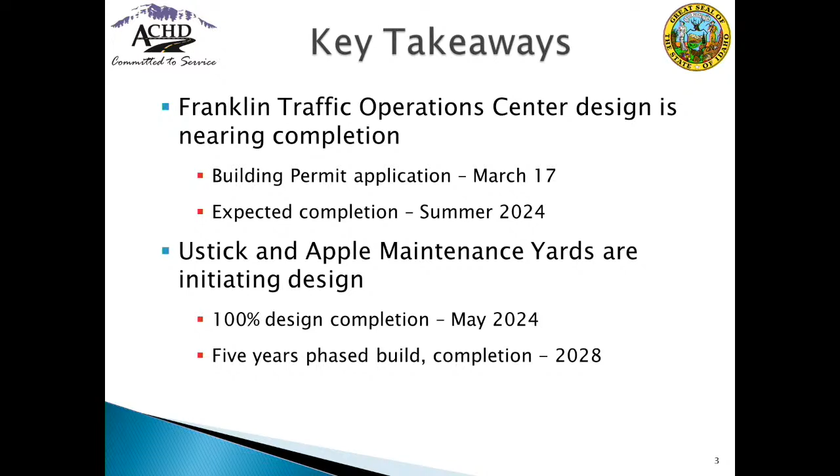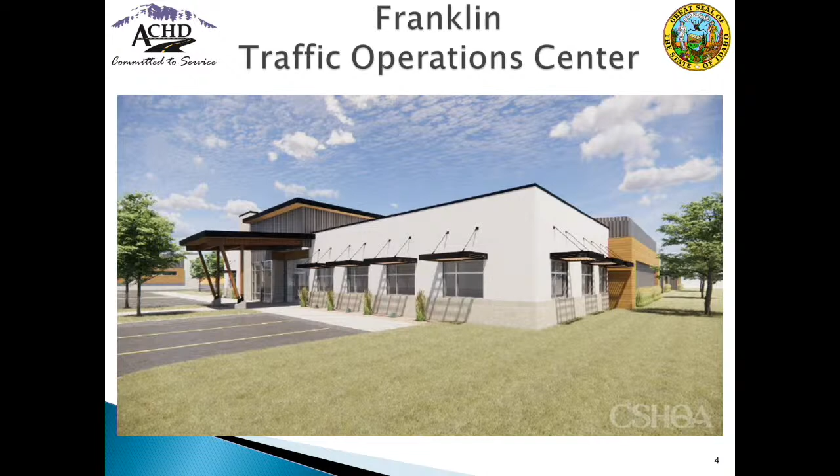This would be the outside and the general idea there. The site will have 4 different buildings. The front up along Franklin, which is there on your right. The Traffic Operations Center will be the main location where staff will be seated. We'll have a shop where we can do construction of new signals, of signal hardware. It's where we will maintain our paint equipment. Currently, it's done in a very tiny garage where the staff has to take apart and rebuild the paint trucks each year. So we'll have equipment there to allow them to do that inside.

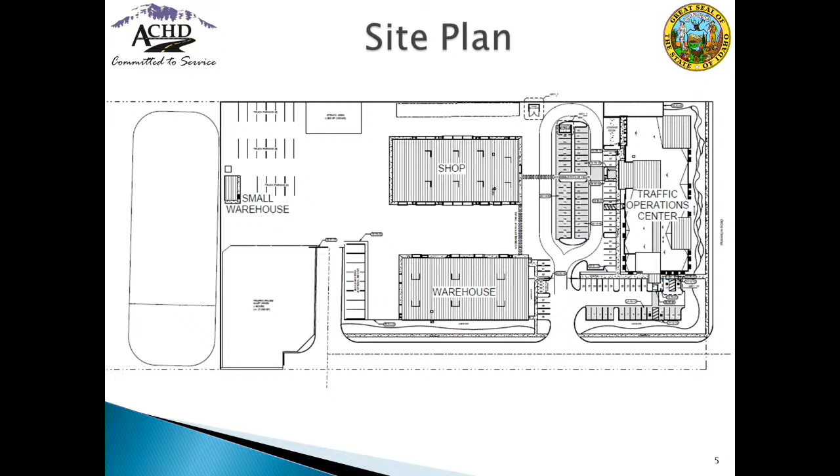We'll have a warehouse where we'll store all of our paint inside and not outside. That's where our signs will be, and all of our traffic signal equipment will be able to be within that warehouse. We'll have some parking for vehicles in the back, as well as a small warehouse for the storage of our telehandler, which is the one that lifts the big heavy mast arms and signal poles, which will also be stored there in the back of the site.

We do currently already have a stormwater basin in the back that we'll be updating to meet the current standards, as well as we've provided through the design process a dedicated easement along the back that could be used for future rails with trails, as that backs against the rail line and as they're able to secure future easements that could be used for that.

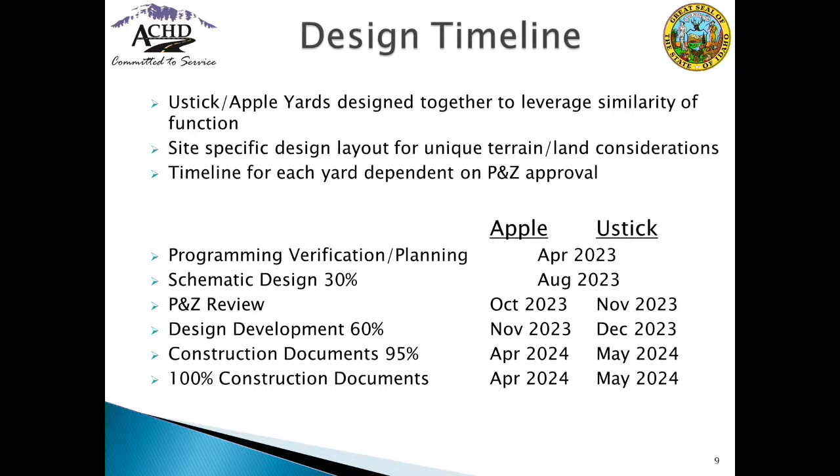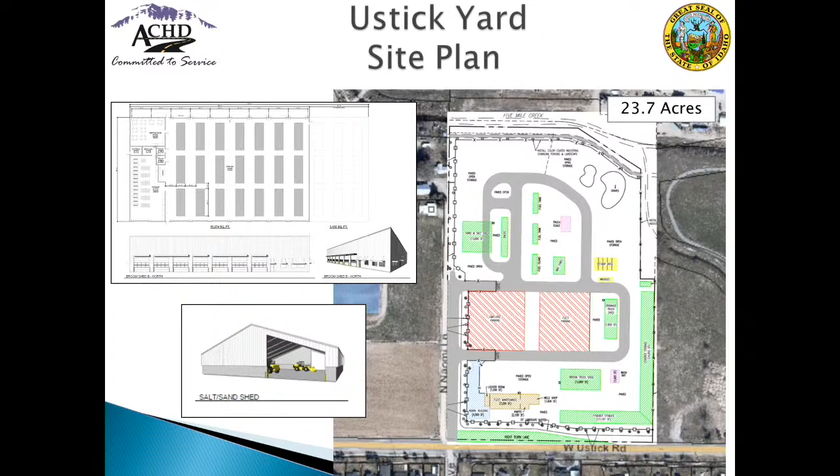What I did want to highlight on this is somewhat of what the buildings are going to look like. The upper one is our broom shed, where we're planning for putting the sweepers in 3 deep, and then 7 across, so planning for 21, but then expansion capability. So when they lay it out in the yard, the buildings aren't going to be crammed next to each other. We're going to leave some footprint for future growth if we need to. So we're not going to build huge and hope that we get there sometime in the future. We're going to build slightly more than what we need right now, with potential for expansion as we continue to grow 20 years down the road. The salt shed at this location is going to be a hard structure, mostly enclosed, so it'll protect those materials as well. We have 23.7 acres at our Ustick site.

Summary of improvements. We're planning all the buildings for all maintenance roles. So right now we have some roles, like our sweepers are just here at Adams, and then we have vegetation and our drainage crew out at Cloverdale. The plan for both the Ustick and the Apple site is to have all of the functions, having that capability at each of those locations. Just because as we're growing so much, getting those pieces of equipment and those crews closer to where the work is being done is going to improve that timeliness. The other benefits: we're going to, like I said, build to an immediate need, plus a little bit, and then preserve footprint for future growth. As you know, with the Ustick yard, a lot of growth in that direction.

So this yard is pretty critical to being able to handle all of that additional growth out in that side of the county. Estimated cost, you'll see, is $25 million. So that's kind of an early estimate based on what we had given to the architect on the size of the buildings. So this was their estimated cost. I think as we look at how things are developing at the Franklin yard and the cost of materials, I do anticipate this will probably be updated once they finish all of the design thoughts and finish kind of the initial concepts of the buildings for us. So we'll continue to keep you apprised of that.

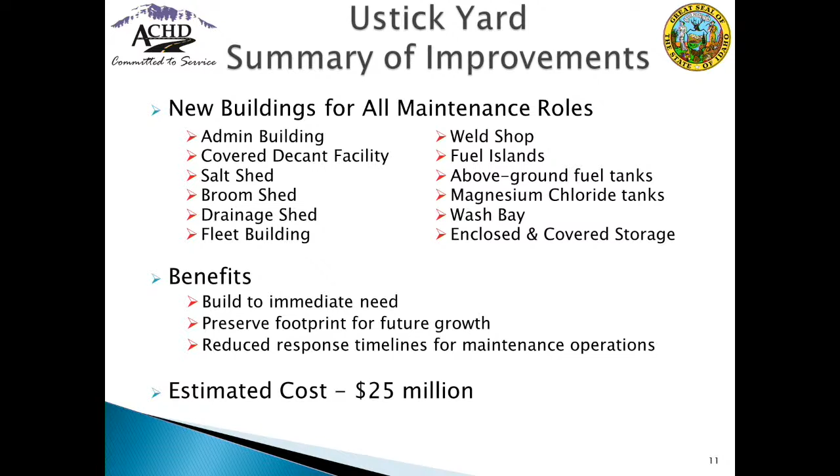The concept for the Apple yard, I don't know, that is a pointer. Up on the north end, this is where Federal Way is. Here, I can do it over here. So this would be the admin building, Fleet Shop, kind of on the frontage there, and then the bulk of operations would be pushed back away from the Franklin yard. It's kind of nice. There's also the railway here, and we're investigating whether or not a rail spur makes sense at this site as well.

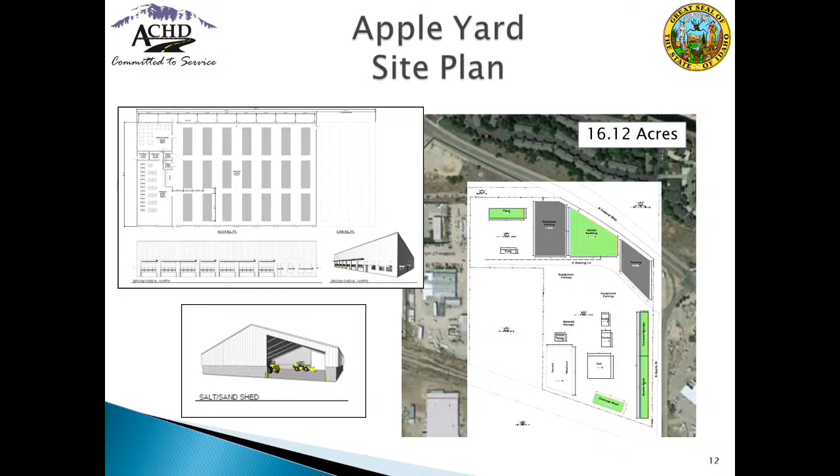Summary of improvements, literally a cut and paste from the previous slide. All the same buildings are being planned simultaneously. The one difference between the two yards that I didn't really highlight is that the Ustick yard is going to have above ground fuel tanks because of the floodplain, whereas Apple Street will have those fuel tanks below ground. And then the benefit is the maintenance coverage for growth to the east, and then of course the dialogue we've been having about Adams yard as well. Estimated cost is the same, $25 million, just based on our size of the buildings and the estimate.

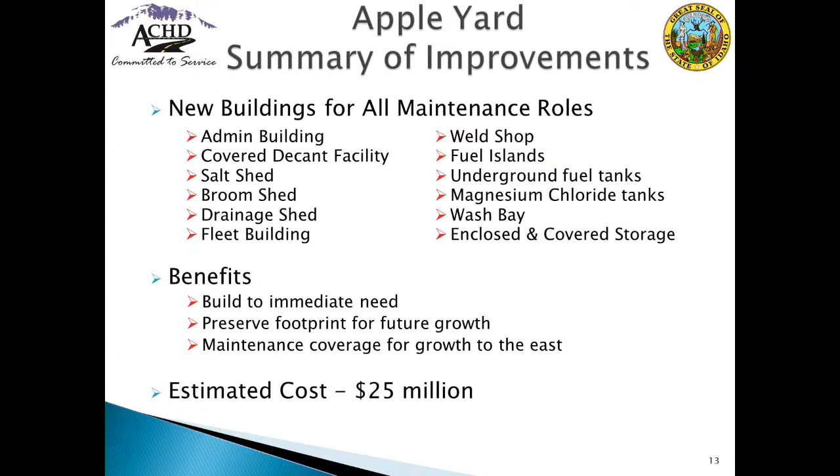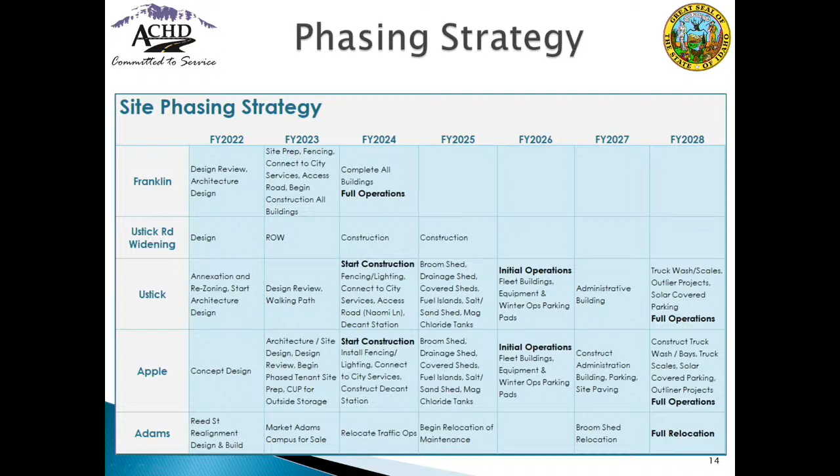So these 2 years, 25 and 26, are really going to be critical for where are we in the development and what does that mean for relocating some of our functions. And that is all I have. So as a summary, the Franklin Yard should be reaching their completion in summer of 2024. And we'll have our design of the Ustick and Apple maintenance yards in May of 2024, and then building out in 2028, 29 maybe. So I will stand for any questions.

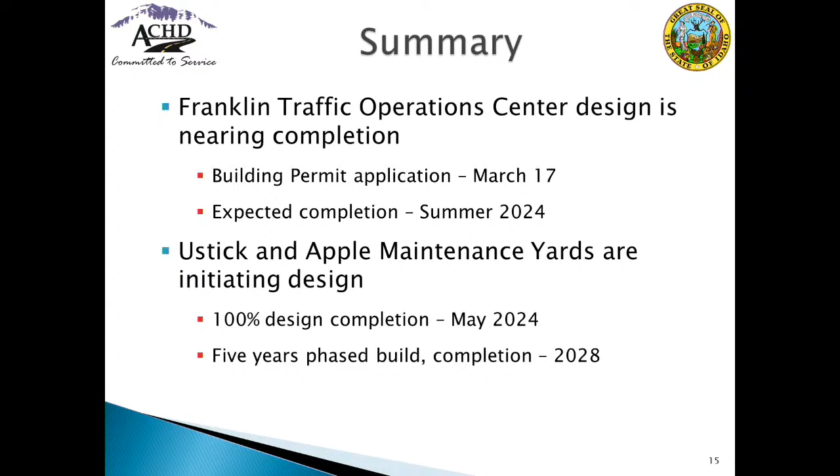Thank you, Jennifer. I have a couple questions. So, for those of us that were on the commission when we all went to Meridian to hear about the Ustick yard, some of their biggest asks in my mind, as we're looking at architecture and all of that sort of thing: how are things going with the fencing for that Ustick yard and those components and the design and all of those elements?

Yeah, we're all still on the very front end of it, but we'll be meeting all of those desires from the City of Meridian. I did want to mention that the design for the Franklin Yard, he showed that, we're going to be mimicking those same looks. So that really does meet, I think, the intent of what Meridian wants for the Ustick frontage. Plus, overall, we'll have these 3 new facilities that will all have very much the same look. So it kind of helps with that identity.

And that was going to be my next question, because it doesn't really matter where we are. We want to make sure that we have a really great presence and really great buildings that we can be proud of. So that's fantastic news. And then I know I mentioned this last year, but in terms of the admin buildings and any landscaping, I want to make sure that we're doing xeriscape or energy efficiencies wherever we can, and making sure that that's part of the design.

Yeah, Madam President, Commission, we have taken that into account as we've worked through the design of this process. For the Franklin Yard, just some of the details, we are using the most current green building code in terms of the structures itself. We have pavers in the parking area, lighter colored pavers is the plan, so that they have that higher albedo there. We are incorporating passive lighting within the shop and the warehouse with skylights so that during the day we won't need to use supplemental lighting there.

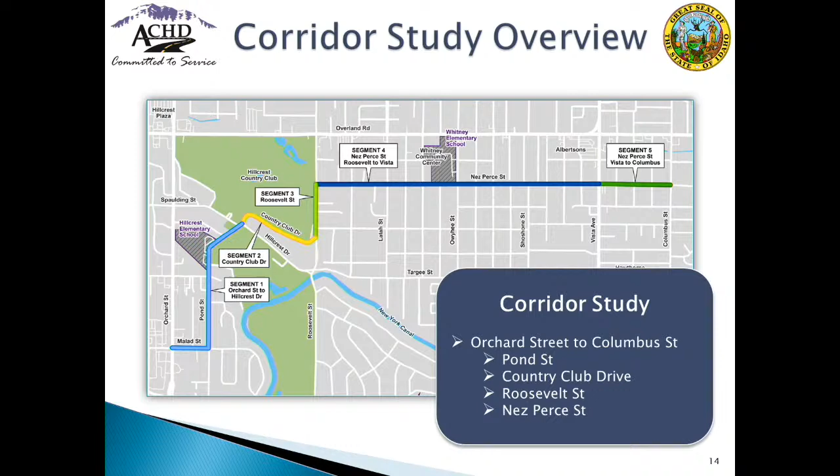On this slide, we wanted to showcase the corridor as part of the study. This is a connection from Orchard Street to Columbus Street, taking advantage of the local network, such as Malad Street, Pond Street, Country Club Drive, as well as collectors with Roosevelt Street, Nez Perce Street, and finally connecting to Columbus Street. Some of the key destinations along this corridor are the Hillcrest Elementary School, the Whitney Community Center and Elementary School, as well as bikeways such as the Columbus Street Bikeway, the Shoshone Street Bikeway, and the Latah Street Bikeway, just to provide examples.

As part of this project, our goals are to recommend pedestrian and bicycle improvements that provide a low-stress experience for all users. Also recommend intersection and crossing improvements that increase connectivity, accessibility, and safety. Emphasize the presence of the Nez Perce Street Bikeway as part of the regional bicycle network and the low-stress bicycle network. And upgrade existing pedestrian infrastructure to comply with current standards and the Americans with Disabilities Act. In this slide, staff would like to highlight the level of outreach conducted for the corridor study.

Starting with the advisory committees, as part of this project we presented an initial kickoff with them and also incorporated them into the email advertisement that we sent for each of the public engagements and also as part of this meeting. In addition, stakeholder meetings with adjacent residents, businesses, schools, and neighborhood association, placing door hangers during public engagement, 3 public comment periods, and 3 virtual public meetings.

From this effort, a total of 109 public comments were received during the comment period, 11 public members participated in the virtual public meeting, and 12 attendees during the stakeholder meetings. From the third public outreach, on average, we received 77% public agreement on the proposed improvements.

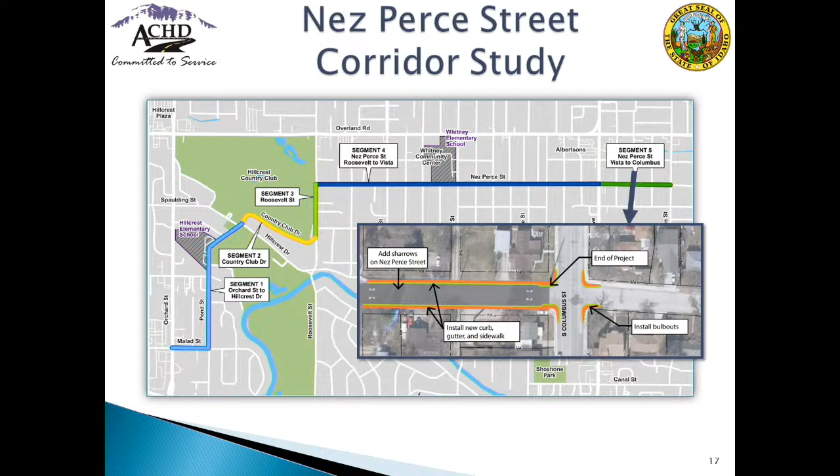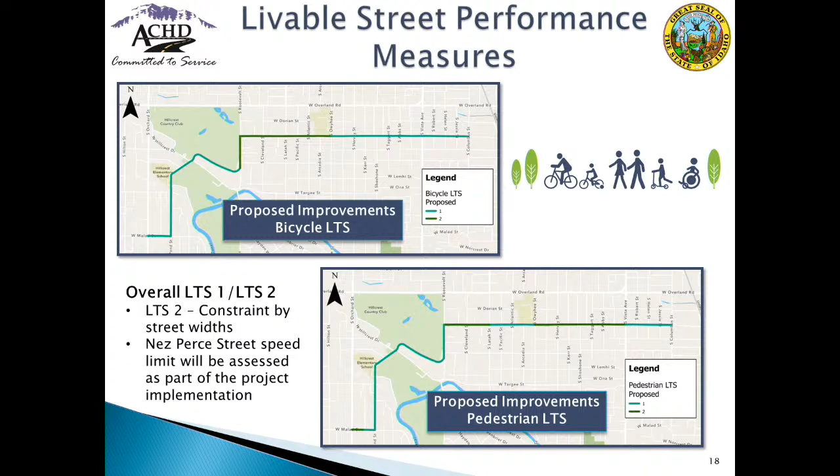In this slide, we want to show consistency with the ACHD livable street performance measures. With the proposed improvements, the corridor would achieve an LTS 1 and LTS 2. In addition, in an effort to meet LTS 1 and LTS 2, the Nez Perce Street speed limit will be evaluated to be reduced from 30 miles per hour to 25 miles per hour as part of the project implementation. Staff would like to clarify that those areas where we have LTS 2 are mainly because of the current street width constraints, and also based on the matrix that we currently have in place in the livable street performance measures.

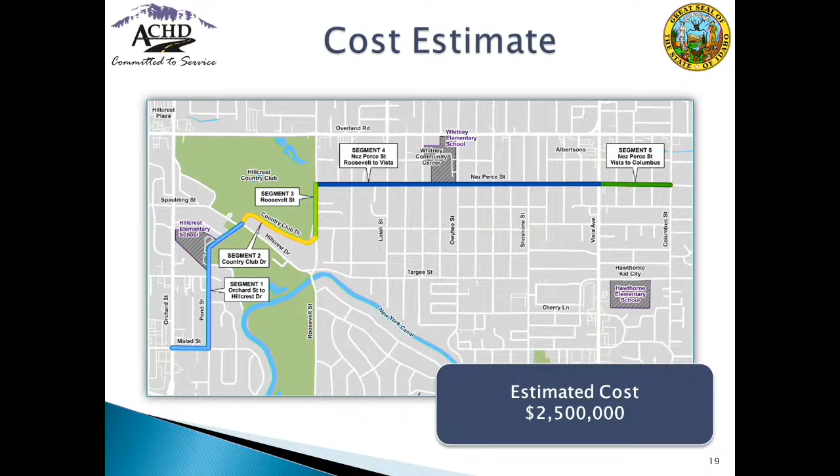Finally, Commission, the cost estimate for all the recommended improvements presented in the Nez Perce corridor study is $2.5 million. Staff is confident in the process, and staff recommends the adoption of the Nez Perce Street corridor study as written. With this, I conclude my presentation for any questions. Thank you, Edson. Commissioners, any questions for staff?

Anyone? Well, this is great. 10 years in the making. I appreciate the comments from our work session being incorporated in adjustment. I think Commissioner Goldthorpe and I both said, let's try and achieve LTS 1 as much as is feasibly possible. And so throughout, LTS 1 is our goal. And I really appreciate the outreach.

You know, it really shows when you didn't hear from people, you went out and talked to them, you went to the neighborhood. There's 2 elementary schools, you went and talked to them. There's businesses nearby. You went and talked to them and got some really good input so that we could anticipate, later on when we're actually doing this, which will be in a couple of years, it's not gonna happen tomorrow. And if they get questions, those folks know they've already been approached and have had a say. Really like that you recognized that tighter turning radius on Country Club.

In fact, I think that a couple days after the work session where they talked about the vision and the turning radius on Country Club, I thought, well, great. I'm sure the response was, hey, we've got a project in the works. And so there's lots of really good components to this. It really does exemplify a really good way of making sure there's a strong sense of ownership over the people in those neighborhoods as to what's gonna happen on a street.

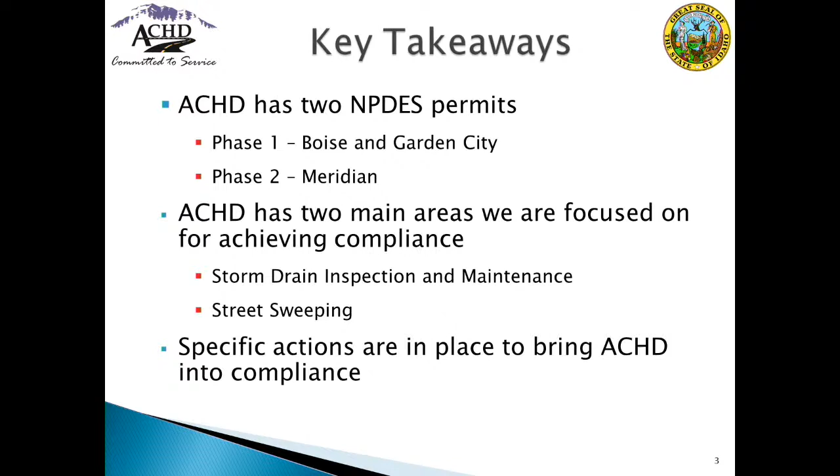And just to kind of touch on graphically what is a permit, as has been noted, we have the largest storm drain system in Idaho that we are responsible for, and water that falls anywhere in our roads eventually ends up somewhere, and usually it ends up going into a water body in some form. We have specific regulations as far as how much of different types of chemicals and nutrients can be in that water. And so there are specific actions that we can take in order to ensure that that water that comes out is clean. We have 2 staff that are dedicated to monitoring that water and make sure that we can test and see how it's coming out.

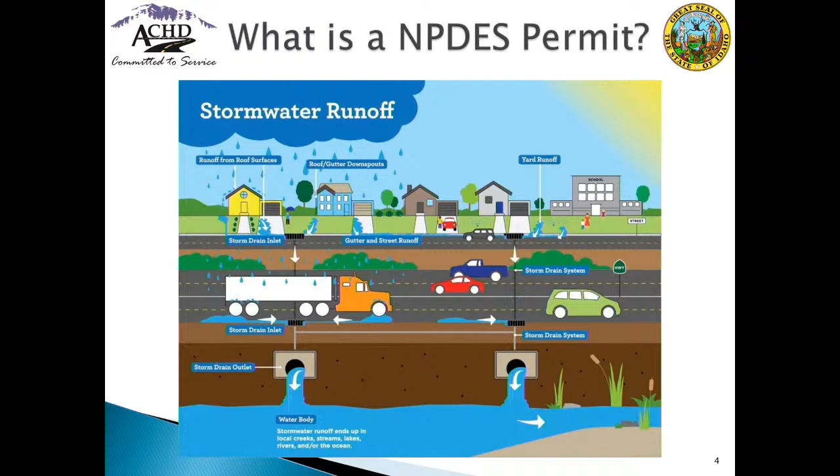We have staff dedicated to ensuring we know when there are illicit discharges into our stormwater, as some of the things that they have to see and clean up are unique and special, and I feel for them. But they work closely with our maintenance crews to make sure that that's complete, as well as some consultant services. But ultimately, that's what a permit's for, is giving us the permission to discharge that water and make sure that it is still in compliance.

So getting into the 2 activities, I'm going to turn it over to Jen to talk about the specific work her team's doing. So we brought a consultant on to kind of take a look at what's the scope of what we have to do. Phase 1, we have 24,111 locations that we need to inspect and clean every 24 months. So there's generally in the Boise area a lot of impact to the Boise River, and ultimately that is our goal, is just making sure that the water that comes out of the sky that eventually ends up in the Boise River is as clean as possible. And with all the natural things that happen on our roadways, making sure that we get the surfaces cleaned, as well as the stormwater system that carries that stormwater.

So of those, the 24,111 locations, those are identified on this graph in the blue. The phase 2 area, over 16,000 locations there. For phase 2, we have to clean every 6 months... Oh, I'm sorry, every 5 years. I'm sorry, I got a glare, 60 months, 5 years. On the graph, those are in yellow. And then the unphased area, nearly 8,000 locations, those are in black there.

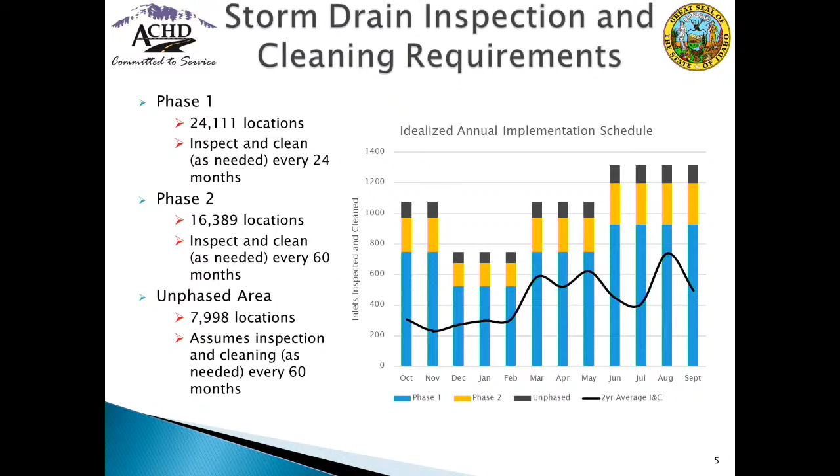So bringing the consultant on, he helped us to identify this. He helped us to identify, here's what we've historically been able to do over the past 2 years. There are some things definitely that we're still kind of coming out of COVID with the hiring problem. We do still have people who take time off. So we're looking at that, and we're looking at the best ways to use our forces, our people, and our equipment going forward.

What the consultant helped us to do is identify on the map these areas that are in red are the priority, the highest priority areas that we need to hit. The bulk of those being, we need to do the storm drain inspections and the cleaning of the storm drain facilities every 2 years. And then as you move kind of further away from some of those areas of impact with the Boise River, it starts to lessen a little bit.

The areas in orange are kind of the tier 2. And then the areas in yellow are where we have the storm drain facilities that aren't necessarily as time urgent to get to. So this map isn't just phase 1, phase 2, and unphased. It's looking at the entire system and where would we get the most bang for our buck, putting our people and resources so we can best meet the intent of the permit.

Because there is some latitude in the permit. If we can't physically hit every single one, that we're showing that we're making positive strides as we're collecting the data that comes to the outfalls. Is it clean water? So this is what the consultant put together for us on the map. The consultant also recommended that we take our vac trucks for the drainage crew, employ 4 trucks focused solely on the priority 1 areas, and our other 2 trucks in priority 2 and 3.

We also want to switch how we're tracking our assets and the inspections and cleaning. So we're developing an in-house app that's going to be very easy for the guys to use when they're... track that and the status, and it's a very easy kind of red and green dots on a map, and it uses our GIS. So when they're going out to the field, they can have a pretty clear line of where they need to go to clean. And then we'll see it immediately switch from a red to a green once that's done, and that helps with the reporting and tracking as well.

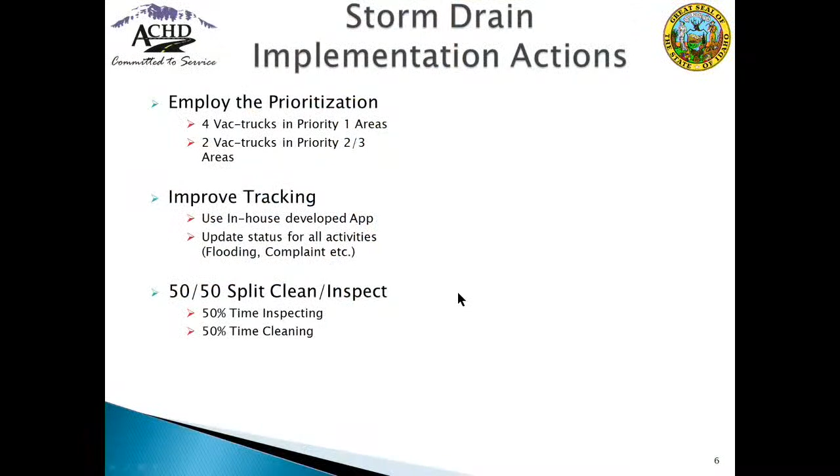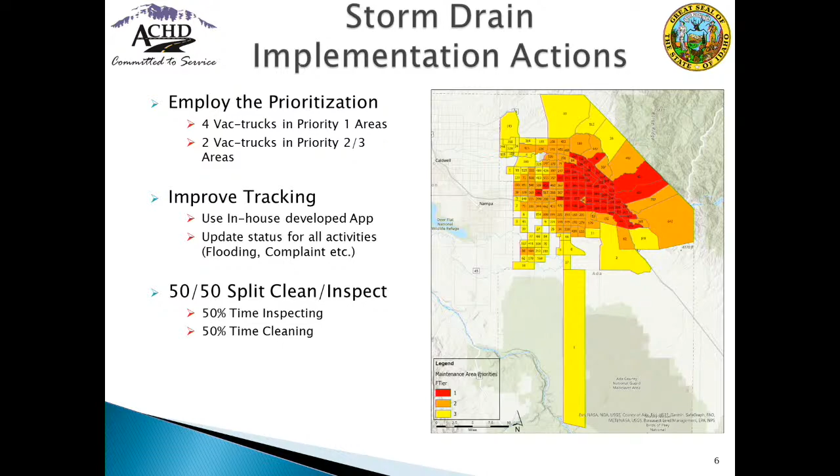I have a question for you, Jennifer. Yeah. On that last slide. So looking at the map, there's a portion, if you look on the west side, where the Boise River goes to South Star, South Eagle. Why were a handful of those little spots deemed as a number 3? Is that based off of the type of drain that it is? Because I would be concerned that those would need to be cleaned because they would be going into the river.

Yeah, Madam President, Commission, the prioritization looked at proximity to the river, the number of outfalls that go into the river. You have a lot more outfalls that go into the river closer into Boise than you do farther out. It was looking at tree canopy. It was looking at other things that would lead to them being a higher priority and more likely to create discharge that's not desirable. So that's where that came from and how we got to that. Thank you.

I have a question. Commissioner Goldthorpe. Just a quick question before I forget. Is there any potential for the cross-training initiatives that we're doing to help solve the staffing problem here? I know we're not going to get any from the vegetation crew.

Yeah, and we do. In some cases, we rely on some of that cross-training that's already in place. Some of the folks who have been in the drainage crew in the past, when we've been in emergency operations, we've pulled some of them in to assist. We've talked about this, where we have personnel who are interested in expanding and not necessarily doing a full plunge into a whole new crew, giving those opportunities to backfill and make sure that we've got as many resources as possible. So yes. Thanks. Yep.

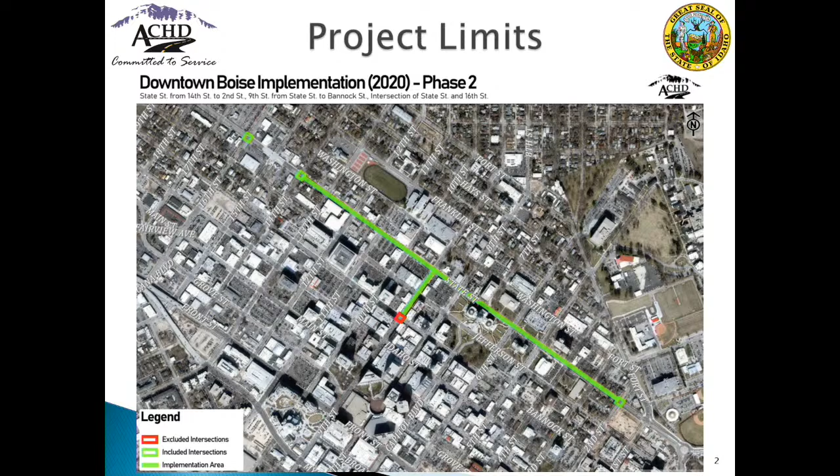And we'll go back a little bit with the project history. There was a downtown Boise implementation plan adopted back in 2013. It seems kind of crazy that it's been almost 10 years. It was a joint effort with ACHD, City of Boise, CCDC, the Downtown Boise Association, and utility companies. We recognized a need for pavement maintenance in the downtown area, but there was also a lot of development, a lot of utilities that needed to be replaced, as well as a lot of streetscaping and work by CCDC. So we all came together and came up with this plan to get them done together and with less disruption to the public.

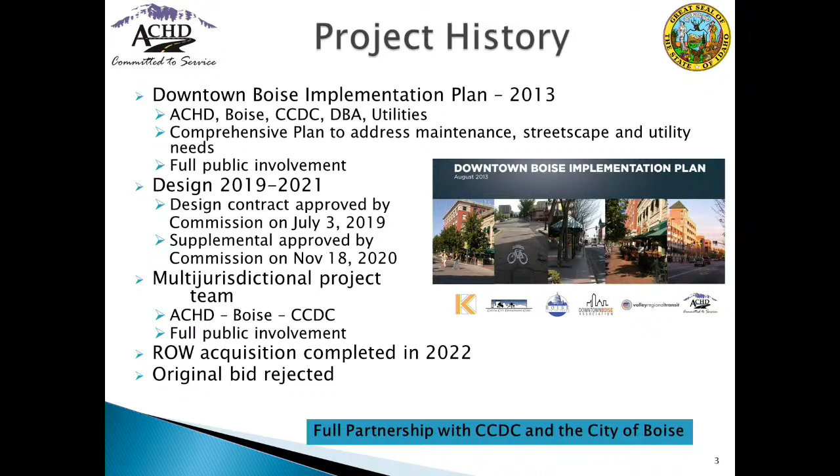This particular segment started design in 2019 and has gone through 2021. The City of Boise and CCDC were on the project team, and we did full public involvement. Right-of-way acquisition was completed last year, and if you remember, we bid the project last year, and the original bid was rejected last August. I will point out, excluding small sections of 5th and 6th that took their own path, State Street and this 9th Street segment are the last segments in the downtown Boise implementation plan to be reconstructed.

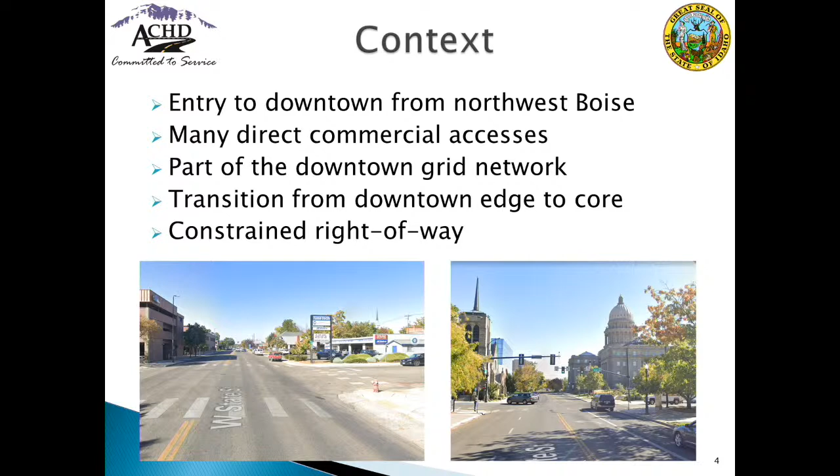And just some highlights of the street condition. The primary purpose and need of this project is the pavement condition. Many, if not most, of the ped ramps in this area are non-compliant, as well as the driveways, and there are a lot of damaged sidewalks. There's limited or inconsistent streetscape improvements along this section too, and there's a couple of photographs here to show those conditions.

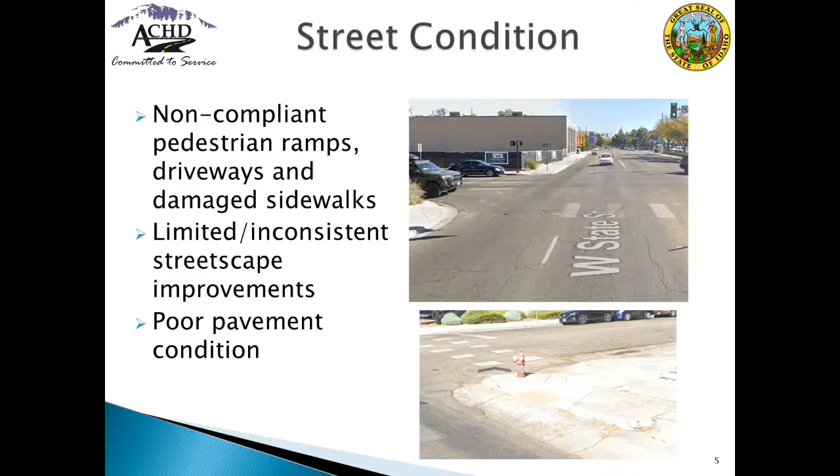The project goals of DBIP 2020 and all of the downtown projects we did, this is straight from our public involvement that we had last year for this project: increase safety, replace the aging roadway, a lot of the ADA upgrades, and partnering with CCDC to do the streetscape. We are adding enhanced pedestrian crossings at 3 intersections. We're doing bioretention, that green stormwater we were just talking about, critical in the downtown area. And it also supports VRT and their bus route, which goes down State Street.

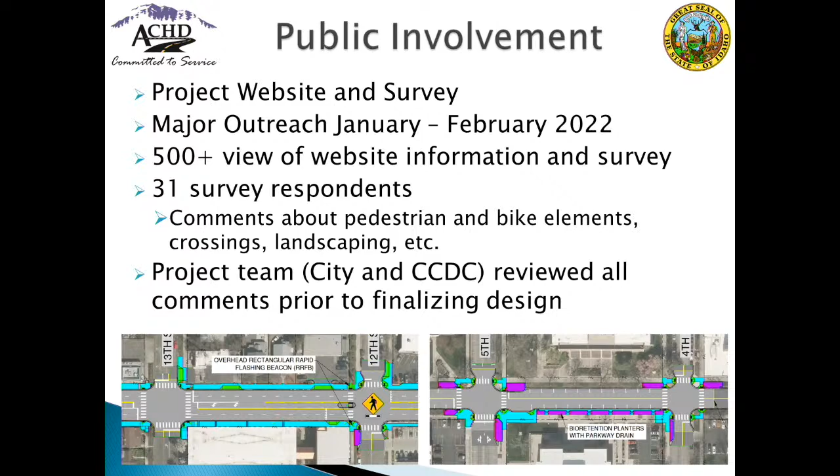So just to highlight some of our public involvement, we had a website and a survey. It was about a year ago at this time in January and February. We had 500 views, 30 comments, and the project team, which included the City of Boise and CCDC, reviewed all the comments prior to finalizing the design.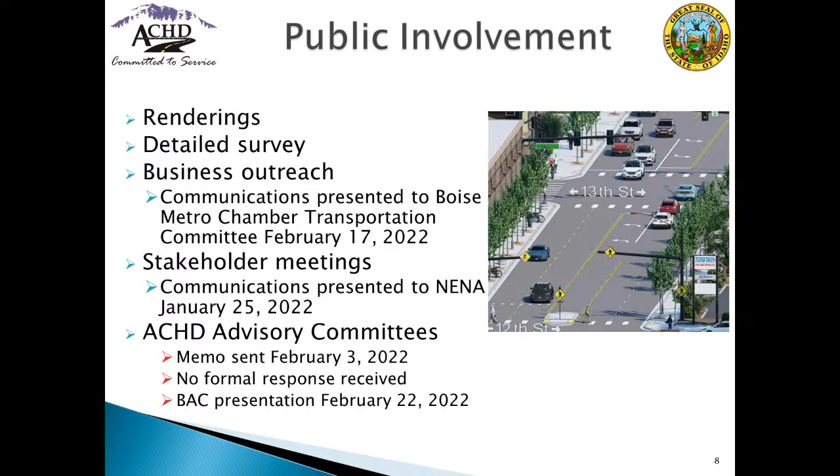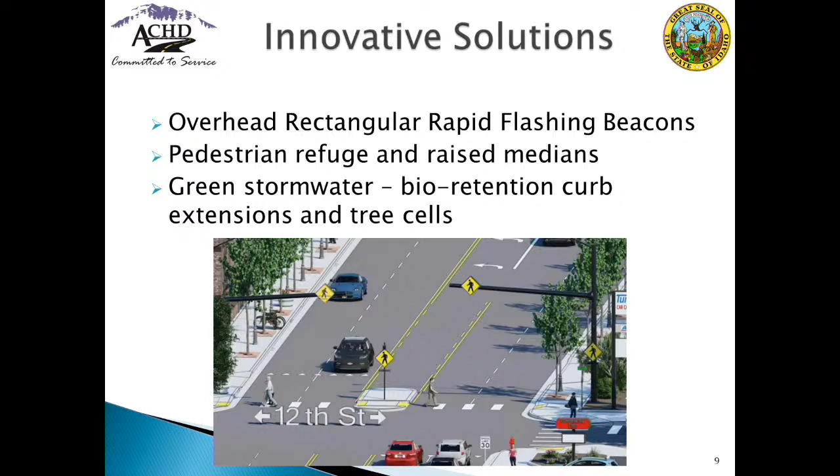Just to highlight some of the innovative solutions on this project, we are using overhead rectangular rapid flashing beacons with pedestrian refuge and raised islands and raised medians. And again, the green stormwater where we have bioretention, curb extensions, as well as tree cells.

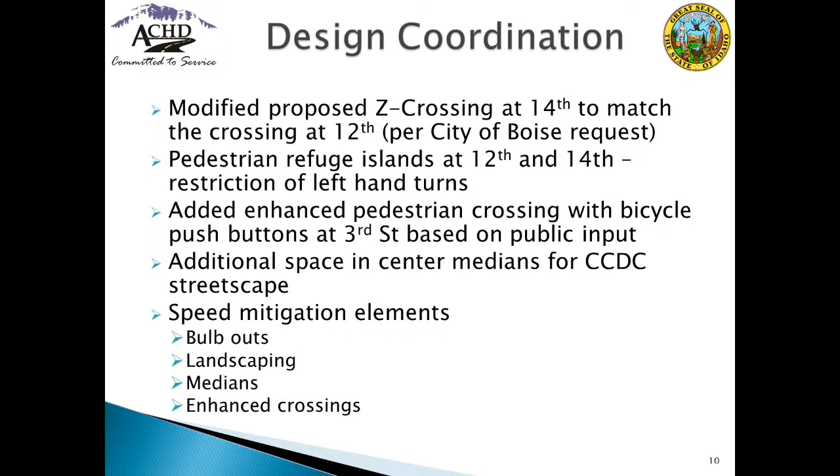Some of the design coordination as we went through this public involvement: we modified a Z crossing at 14th to match the crossing we have at 12th, which is straight across with a refuge island, at the request of the City of Boise. The pedestrian refuge islands at 12th and 14th do restrict left-hand turn lanes, providing more safety for pedestrians. We added an enhanced pedestrian crossing at 3rd Street based on public input, including the bicycle push buttons. We allowed some additional space for CCDC to do streetscapes in the medians. And we have many speed mitigation elements, including bulb outs, landscaping, medians, and enhanced crossings.

Another highlight is State Street will all be reconstructed using concrete pavement. That recommendation was made by our district engineer and approved by the commission on November 18th, 2020. Some of the reasons were that the section we have to dig out for concrete is less than asphalt, and it removes major impacts to utility companies. There would be a lot more impacts to utilities, especially CenturyLink, that would have to relocate major fiber along this corridor. And the lighter road surface would negate some of the heat island effect in urbanized areas.

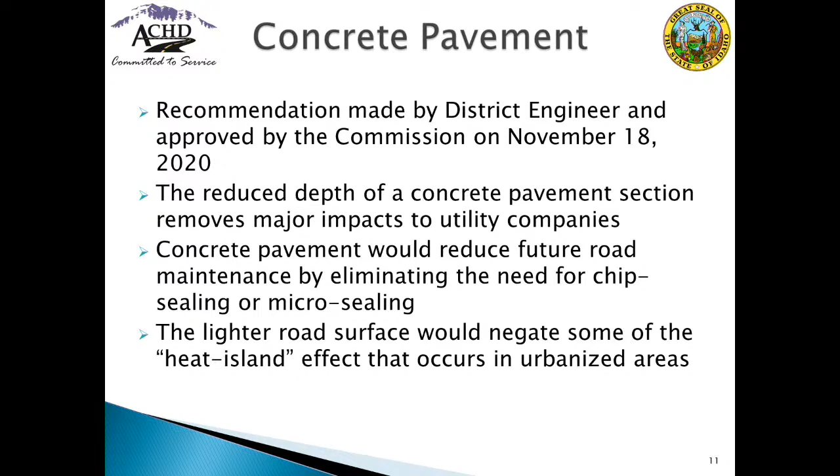The current status is the funding for this project, as you heard today, not the entire funding. We are asking for a budget adjustment, but the majority of the funding was budgeted through the 23-24 budget and the integrated 5-year work plan. The original bid rejected by the commission on August 3rd was $15,785,000. We rebid it and opened that bid on February 1st. The low bid was a little lower at 15.5. 2.8 of that is CCDC's work for conduit and streetscaping. City of Boise has committed to landscape those bioretention areas, so that $2.8 million doesn't include the plant materials.

Let's see, I know there was another note. Yes. So the next step is the commission will consider the bid award next week on our agenda, and I will stand for your questions.

Commissioner Goldthorpe. Yes. Oh, turn your mic on.

Sorry, thanks. A little bit of history for this particular part of our county. Every couple of years, we hire someone to do a PCI index for us for either residential or arterials, collectors, that sort of thing. And every time we've had an index come back that included downtown Boise, in the years that I've been here, we've seen that the very worst roads in all of Ada County are in downtown Boise.

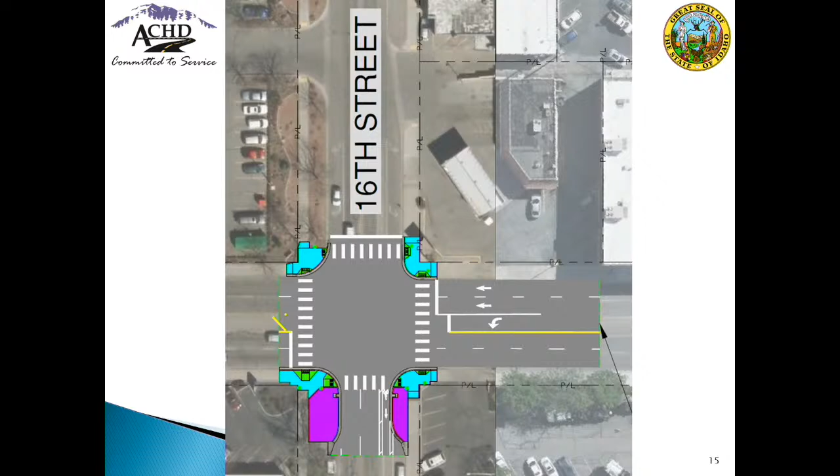Commissioner Gold. I do have a question on the previous intersection. Can you speak to the reduction of a leg of the pedestrian crossing there? I think it's the west side of that intersection.

Yeah. President Pickering, Commissioner Gold, when we put in these, usually more than 2 lanes, sometimes we'll do it on a 3-lane, but especially for these 5-lane crossings, when we put in an enhanced crossing, we want people to use that and not cross against the enhanced crossing. It just makes them more visible, especially to drivers. It's where they're expected. So we'd rather them cross 14th Street if they need to cross State Street.

And we did evaluate that, and because traffic is so low on 14th Street, we thought that was worth the additional 2 crossings, even if you have mobility or visual impairments. We thought that would ultimately be safer to direct people towards the RRFB instead of crossing without it. Is that your question? Yes, thank you.

Madam President, follow up to that. So this is the intersection that was previously proposed as the crossing that now has a refuge island. And this is a single stage pedestrian crossing. Okay, thank you.

Commissioner Hansen? So, Madam President, thank you. While we're on this, you're adding the center turn lane, so the crossing distance will be increased. Go back to the 14th. Okay. And so the expectation is that pedestrians will do something which they don't do today: if there's a pedestrian walking on the west side of 14th, they will be expected to go east and then cross and then go back west again, even though this is a pretty dense urban area and it's getting denser by the day.

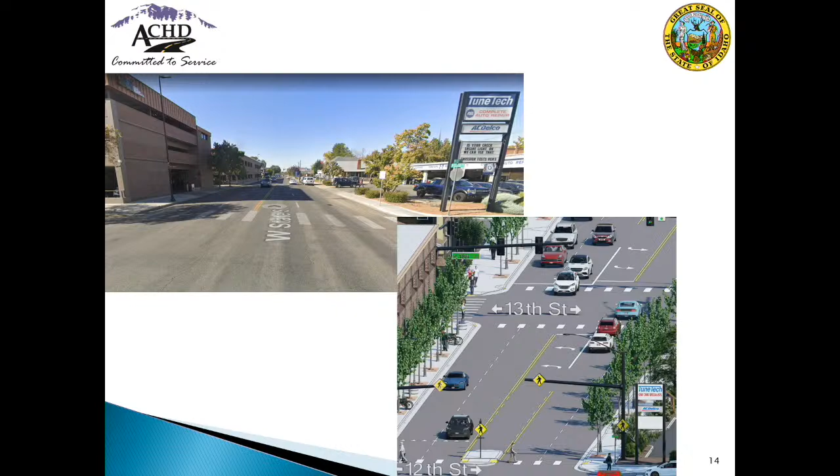Commissioner Hansen, we are saving those trees. All the big trees. Yes, sir. Can you repeat which section would be saved there? Between 11th and 12th? 10th and 11th, and 11th and 12th. Okay. And is that the entire section that you were referring to?

The city asked for consistency, and instead of consistency between the blocks on the other side of the State Insurance Fund, we're going to make it consistent with the width of that in front of the insurance fund. And I don't see the justification for that.

Commissioner Goldthorpe? Again, I'm kind of the history guy today. Over the years, we've discussed to the nth degree, not with some of you here, but trust me when I say we have torn this apart like nobody's business when we've discussed the safest routes for bicyclists. And we have decided on past occasions, not all of us were involved in that decision, but to make Jefferson,

Main Street, Idaho, we have streets that are built and being built and planned to be built with some specific bicycle treatments. This was never one of them. This is the only multi-lane, a little quicker type road to get in and out of town north of Front Street and Myrtle.

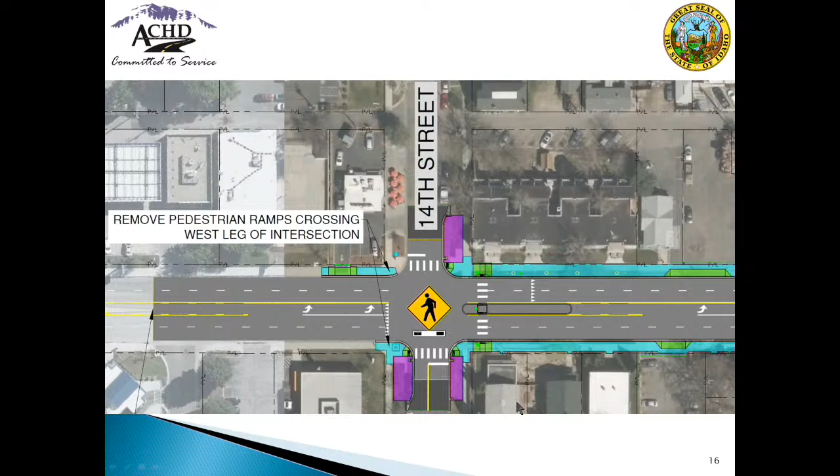Between 14th and 13th, I will point out that with the left turn lane here, we are able then to do red before ped. With no left turn lane, we are not able to do that. So that's a benefit of having the left turn.

Okay, thank you. So Commissioner Goldthorpe, I totally understand where you're coming from in terms of, hey, we've talked about this a whole lot, right? Because you've been here. You've spent a ton of money, right? I can understand the fatigue with that. So with that being said, there's 3 of us that haven't, and even if, Commissioner McKinney, you feel like it's fine as it is, that's okay too.

But I think we have so much, and again, I think the staff did the best they could, and I feel like it does improve the corridor, but my whole point is, if we're spending this amount of money, and we've gone to this amount of effort, why not just tweak it the way that our community has asked for it to be tweaked, and as potentially some of the commissioners are asking for it to be tweaked, so that it can be exceptional. Well, I've never heard a single person in the community ask for this.

Again, I'm just saying, as a commission, we've already responded to being more sensitive to the deaths of folks that have died along State Street and the accidents on 11th and State. And the removal of a crosswalk, all of these pieces, right, we wouldn't consider now. And we're just saying, oh, okay, well, because this is such a mostly baked project, it's fine.

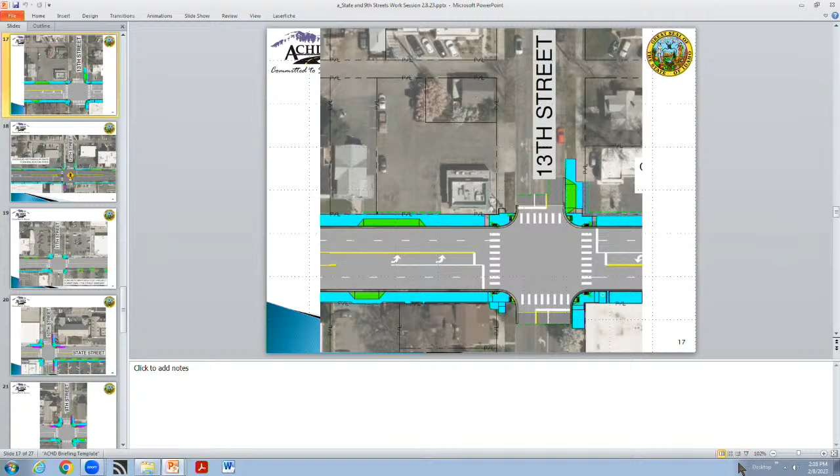Thanks, Diane. Okay, now we're live. Madam President, we are able to delay the bid award another week to give you 2 more weeks from today to come back for that. And we can look at some other things and bring back some options for you with that bid award on March, I believe it's March 1st. Or the 22nd. That would be 3 weeks away. Yes. February 22nd.

Madam President? Commissioner McKinney? Diane, in a case like that, what can happen if a bidder has already submitted a bid? Do we request all the bidders to reconsider these things? Because that doesn't work. How does this work? Okay, we're gonna get our lawyer. That's good. We have a bid before us. Right. And we have to accept or reject it. Right. I think maybe in a separate motion, the commission can direct us to look at some items to then change through a change order. Right. Steve, confirm that. So those are change orders, certain pieces potentially. Yes, sir.

And once you have a low bidder who's got the job, change orders get really expensive because they know there's nothing competitive on those. That's why change orders get so expensive. Commissioner, we do negotiate those. There are parameters around changes in quantities and unit prices that help protect us with change orders, and those are negotiated. They're not just a given. Right, I know they're negotiated, but having done contract management on a number of construction projects, I just know that change orders get really expensive. For that reason. Again, it will depend on what the changes are.